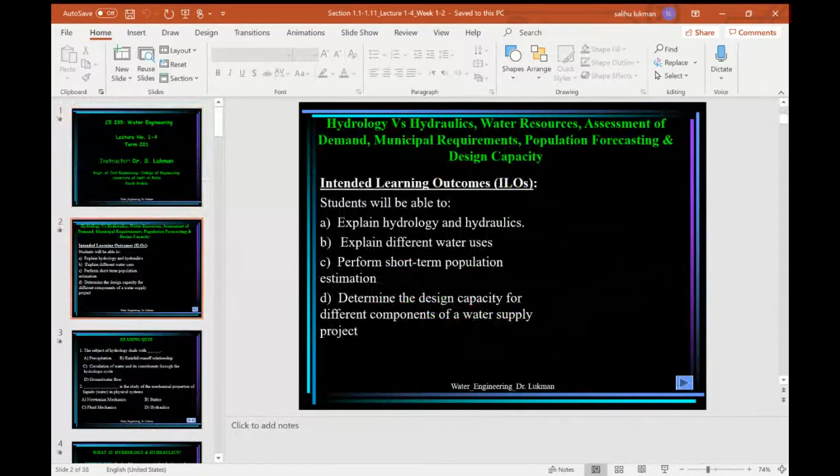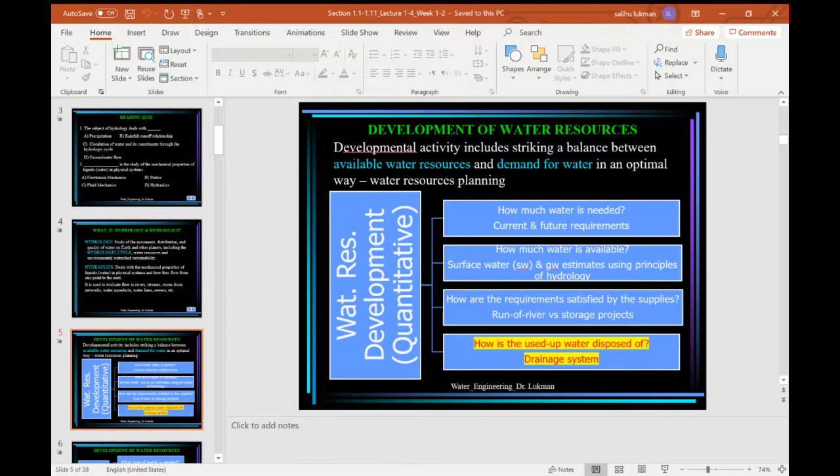Okay. So if you remember, last week we started explaining what is hydraulics, what is hydrology, and what do you mean by water resources. So I'm just giving you a recap of what we did previously. We discussed development of water resources, where we looked at the quantitative aspect as well as the qualitative aspect. The quantitative aspect deals with water engineering and the qualitative aspect deals with environmental engineering. And then the demand for water supply: we explained the 3 types of demands, withdrawal uses, non-withdrawal, and consumptive use.

By the way, who can tell me what is consumptive use, before we move on? Doctor, what's the question? Who can tell me what is consumptive use? What do you understand to be consumptive use from the previous lecture? Under water demand, I explained there are withdrawal uses, non-withdrawal uses, and consumptive uses. So what do you understand about consumptive use?

Doctor, when you take an amount of water and use some of this amount and retain the rest. When you take an amount of water, for example 10. When you have some water, we can use it again. So where will the water go? How can we lose the water? In withdrawal, maybe from 10 to 20 percent of the water we can't use again, right? Yeah, but how can we lose it? Why does it become lost?

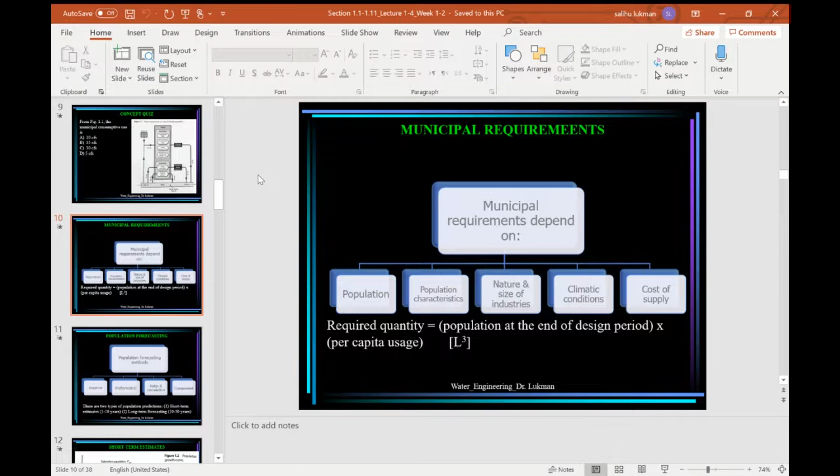That is water quantity that is no longer available for further use, isn't it? It is used up by crops, humans, evapotranspiration, industrial processes. I give you an example. When you take water, let's say you take 500 milli, do you understand? You cannot urinate, you cannot excrete all the 500 milli. You may excrete, let's say, around 400 milli or 450 milli.

But there will be some amount that your body cells will use in metabolic activities and cell growth and what have you, that cannot be excreted. Do you get the point? Can you hear me? Yes, doctor. So similar to crops, they need water for their growth.

So when they extract water from the roots buried inside the soil, some of the water they extracted from the soil is released through what is called stomata. These are tiny openings at the underside of the leaves. So they release the water through that. But some of the water is used for their growth. So they cannot release some of the water they extracted from the soil.

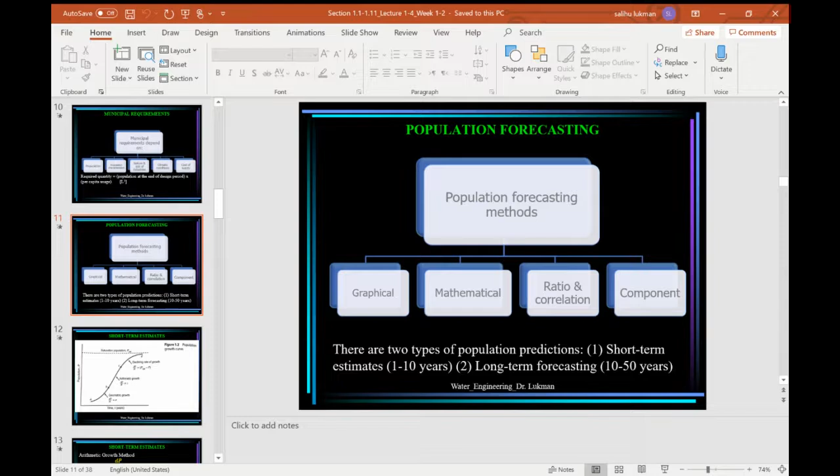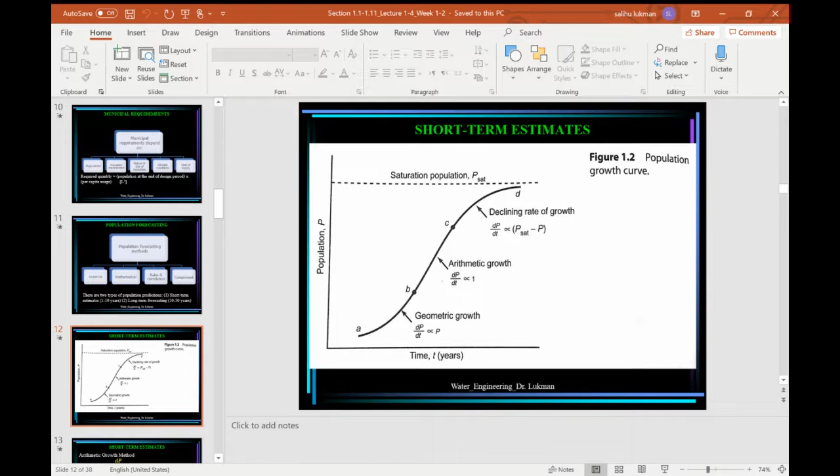We know this curve, which explains the geometric growth, arithmetic growth, and the declining rate of growth. A to B is the geometric growth, B to C is the arithmetic growth. And the formulations of each one, we derived them, and we solved an example. Is it clear? Shabab, is it clear? Yes, Doctor.

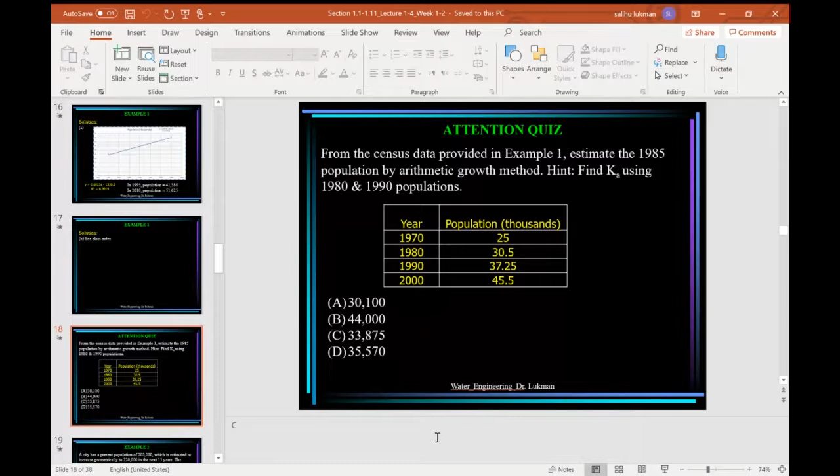All right. So now we will look at per capita water usage. Let me see if it has uploaded it. Try again. Okay, it has failed. Okay, so it can still continue.

So per capita water usage. What we mean by per capita is per person. Capita equals person. So it's the same thing as saying per person use. How much water do you need normally in a day on the average? It's normally expressed as the average daily rate, which is the mean annual usage of water averaged for a day in terms of gallons or liters, and it is indicated as per capita.

Let me use the red pen here. Oh, it is still not showing. Okay, let me use the blue one. So you have seen LPCD, isn't it? LPCD means liters per capita per day. L for liters, P for per, C for capita, and D for day. So the per day is missing, it is not shown there. So LPCD means liters per capita per day.

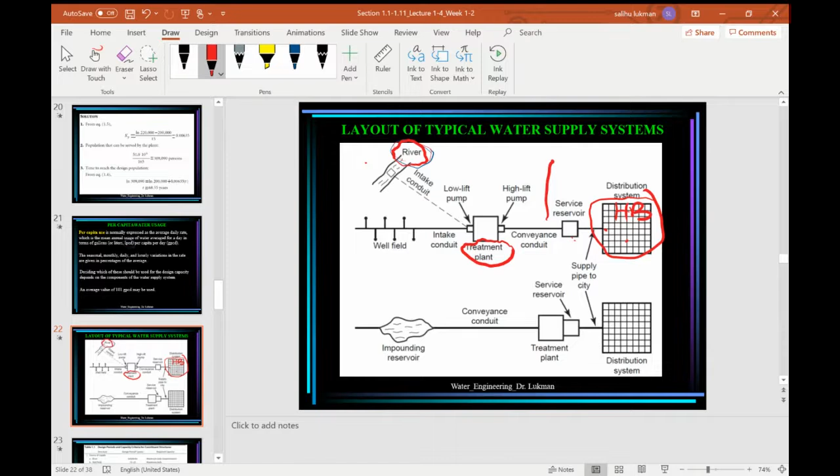So now there are two systems of distributing to households, okay? One is by gravity. By gravity here, it means you have a service reservoir which is, like I said, raised above the ground level, okay? This is like a huge tank containing the water, raised above the ground level so that water can just flow by gravity to the distribution mains, okay?

So each house has two tanks. You have the underground storage tank and the overhead tank, which is at the rooftop. Do you get the point? So the treatment plant will pump water to the underground storage tank of individual houses. And the individual houses will install a pump that will pump the water from the underground storage tank to the overhead tank. And then the overhead tank will supply all other plumbing in the house. Do you understand? So here, we don't use service reservoir, but there is direct pumping.

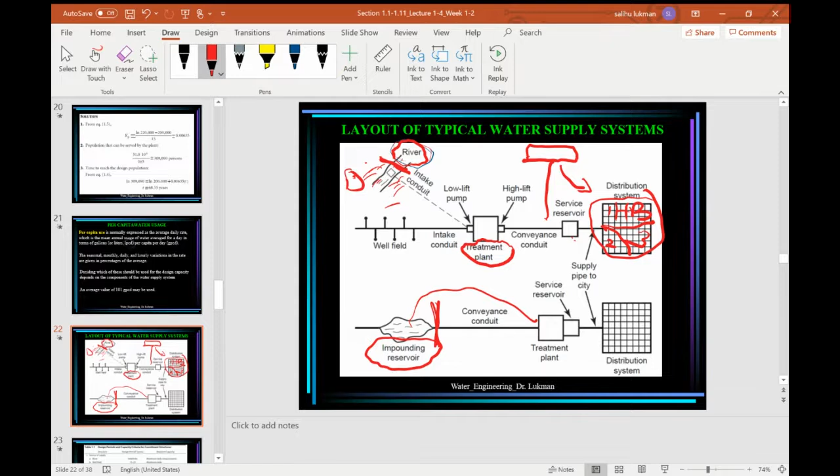Is that clear? So here we are explaining two types of typical water supply system. This is the first one, and this is the second one. The first one is using a service reservoir, okay, which is an elevated tank in the downtown, so that water will flow by gravity. In the first one, from the treatment plant to the service reservoir, water is pumped, but from the service reservoir to the distribution system, the flow is by gravity.

Is that clear? While in the second case, from the treatment plant, directly water is pumped to the distribution system without having a service reservoir. In this case, service reservoir is not available. So you pump straight into the distribution system. Like I told you, this is what is happening at Hafr Al-Batin, okay? Hafr Al-Batin town is divided into zones.

So they pump directly from the treatment plant. Here also you can have a service reservoir at the treatment plant, or you may not have it, okay? You can pump directly into the system, okay? And later in the last chapter, chapter 5, we are going to study the different distribution system, because the distribution system here is something else, okay?

This is called a loop distribution system, okay? And we have what is called the open distribution system. You have the branch, which is the open, okay? The branch distribution system and the loop or closed distribution system, okay? This we will study at the end of the course, which is in chapter 15, okay?

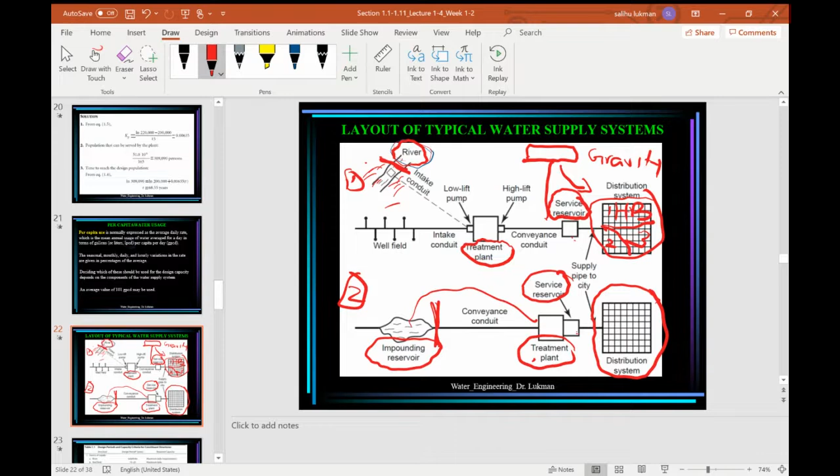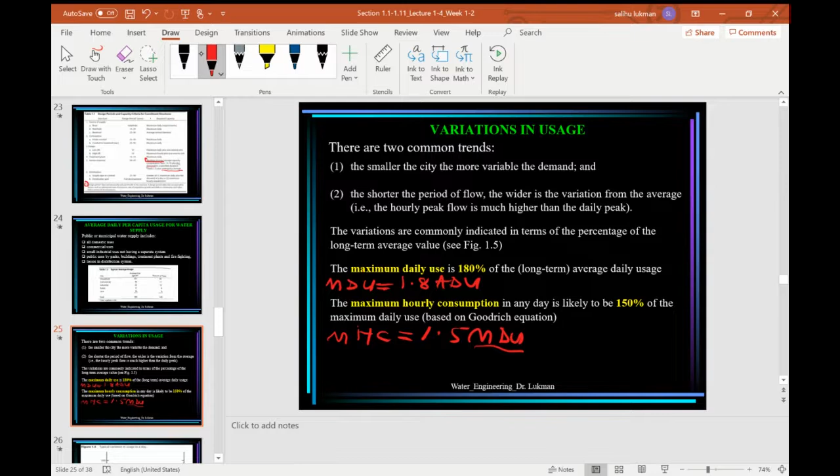Yes, Doctor, clear. Okay, now, based on the second statement, it says the maximum hourly consumption in any day. So let me represent the maximum hourly consumption as MHC, which is equal to 150% of the maximum daily use. 150% is 1.5, isn't it? Of the maximum daily use. Maximum daily use is MDU, correct? So now, what is MDU? MDU is 1.8 ADU. So 1.5 times 1.8 ADU, correct?

From here, isn't it? Now, the maximum hourly consumption, 1.5 times 1.8 is 2.7 times average daily use. And 2.7 in percentage is what? 270% of the average daily usage. Do you understand? So the relationship now between maximum hourly consumption and average daily use is that the maximum hourly consumption is 270% of the average daily usage. Do you understand? Do you understand this simple relationship?

Okay, good. Abdulaziz, you said 2.7. So, Abdulaziz, did you write your 2.7 after I finished my analysis? Before, okay, good. So Abdulaziz got it right in that case. Okay, so let's move on. But I hope it is clear to you.

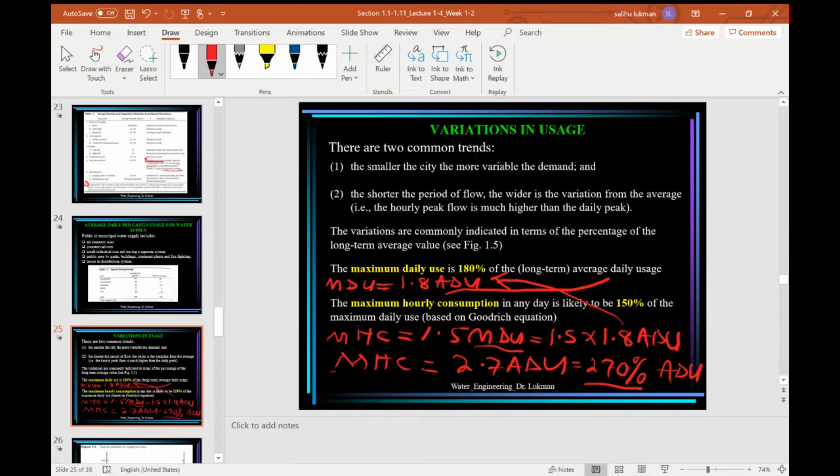Now, let's take this example. Here there is an equality sign. Here also there is an equality sign. Now, this example says: for a city having an average daily water usage of 150 gallons per capita per day from the municipal supply, determine the maximum hourly requirement, excluding the fire demands. What we were given here is the average daily usage, which is 150. We are asked to determine the maximum hourly requirement. We just found out that the maximum hourly requirement is 270 percent of the average daily.

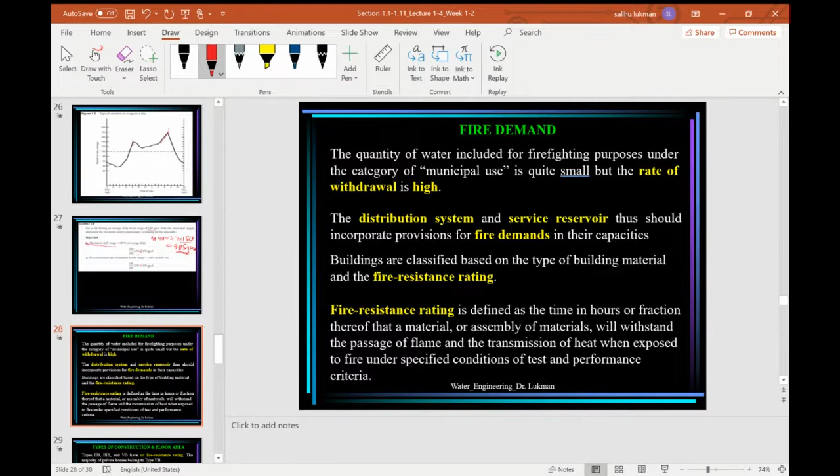Flame here is fire, isn't it? Can tolerate flame or transmission of heat when it is exposed to fire under specified conditions. Okay, that is the fire resistance rating. What are the types of construction materials? Types of construction and floor area. Here we have types 2B, 3B, and 5B. These three types have no fire resistance rating. The majority of private homes belong to type 5B. They have no fire resistance rating.

Okay. The fire area is the total floor area in square feet of all floor levels. All floor levels, meaning you can have two floors. If you have two floors, you will have to add ground floor and the first floor. So the fire area is the total floor area in square feet of all floor levels under the horizontal projection of the roof of a building, excluding the basement. For most development projects, the building with the largest fire flow determines the requirements for the entire project.

Why do we choose the building with the largest fire flow? If it has the largest fire flow, then that means it will need the most amount of water. So if you will be able to take care of the building with the largest fire flow, then definitely you should be able to take care of buildings with less fire flow, isn't it? But if you base your design on buildings with less fire flow, then your fire demand will not be able to take care of buildings with largest fire flow. Is that clear?

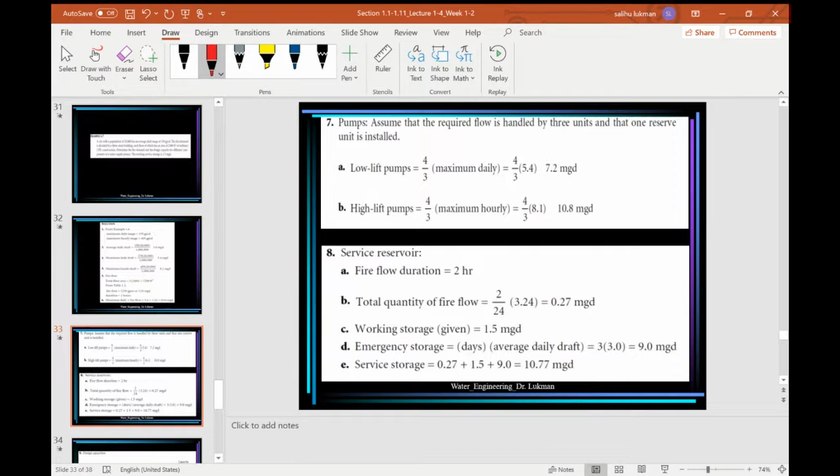So we will take a 5 minute break, and when we come back, we will take an example on how to calculate the fire demand and how to design the different components of the water supply system.

Okay, let's take 5 minutes. Yes. Okay, doctor. All right. So see you back in 5 minutes.

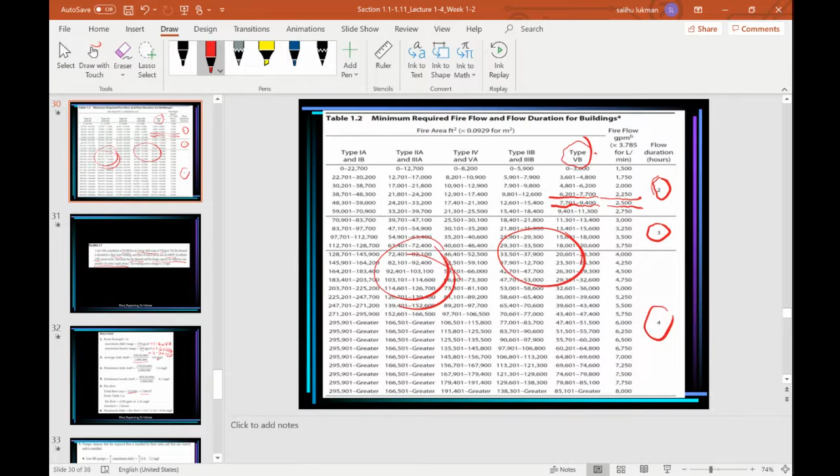Okay, so 3-story building here, the total floor is 3 times each floor of 2,400. So this is the total floor area, 7,200. So we now go to that table to determine the fire flow and duration. Our area is 7,200. The building type is type 5B. So where is the area falling? 7,200 falls here, between 6,200 and 7,700. So we now go ahead to determine the fire flow, which is 2,250 gallons per minute, and the duration is 2 hours.

Okay, so let's go back. You can see that 2,250 gallons per minute, or in million gallons per day. This is gallons per minute. If you want to convert it to million gallons per day, it will be 3.24 million gallons per day. And how do you do that? This is gallons per minute. So the first thing you do is to convert it to gallons per day. And then when you convert it to gallons per day, you divide by 1 million, and that's it.

And you know how to change minute to day. 1 day is made up of 24 hours. Each hour is made up of how many minutes? Each hour is made up of 60 minutes. So 24 by 60, that gives you the number of minutes. So 1 over that. So I hope you can convert between gallons per minute and million gallons per day. I hope you will not have an issue there.

It is simply, let me try to do it here. This is gallons per minute, and then the same gallon. Now 1 minute is 1 over 24 hours in a day times 60. So this will go up and multiply this, okay? And then you divide by 1 million. So when you do this, you will arrive at this value here.

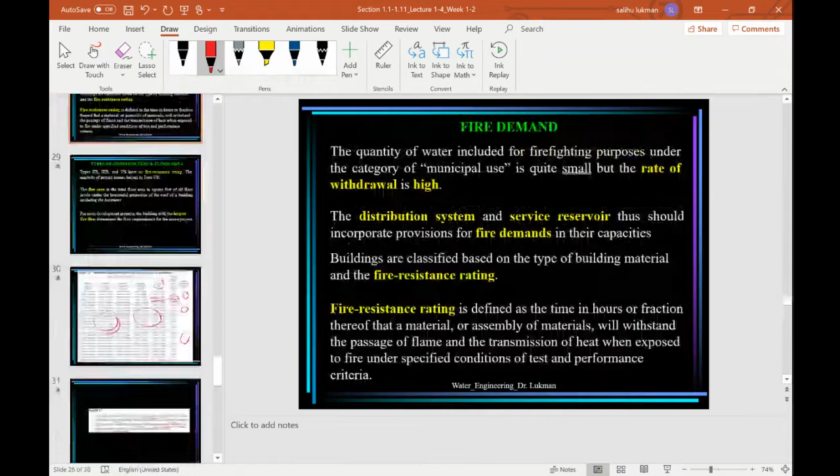Okay, now maximum daily plus fire flow, because in one of these tables, let me go back, you have one having maximum daily plus fire flow. To design the distribution main, you need the greater of maximum daily plus fire demand, or maximum hourly requirement. So we need to determine the maximum daily plus fire demand so that we can compare it with the maximum hourly requirement. Whichever one is greater, we pick that and use it for designing the distribution system. So that is why we are determining the maximum daily plus fire flow.

The maximum daily draft is already computed here, 5.4, plus the fire flow, which is 3.24, so altogether 8.64 million gallons per day. Now we'll go and look at all the different components of the water supply layout, starting from the pumps. We have two pumps, low lift pumps and high lift pumps.

Assume that the required flow is handled by 3 units and that one reserve is installed. Normally for the pumps you have more than one working simultaneously. So here we are assuming that the required flow is handled by 3 units, meaning you must have 3 units to be able to pump the required flow. But at the same time, you always have a reserve in case you want to take any one of them out for service or any of the pumps has broken down. So you must have a reserve unit.

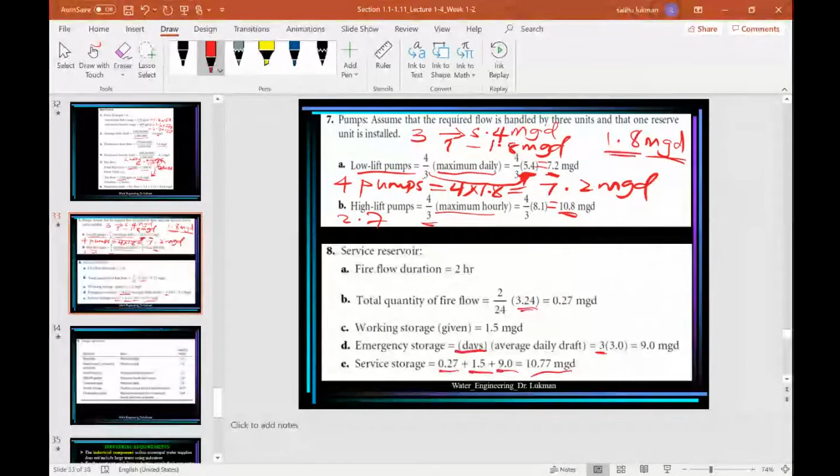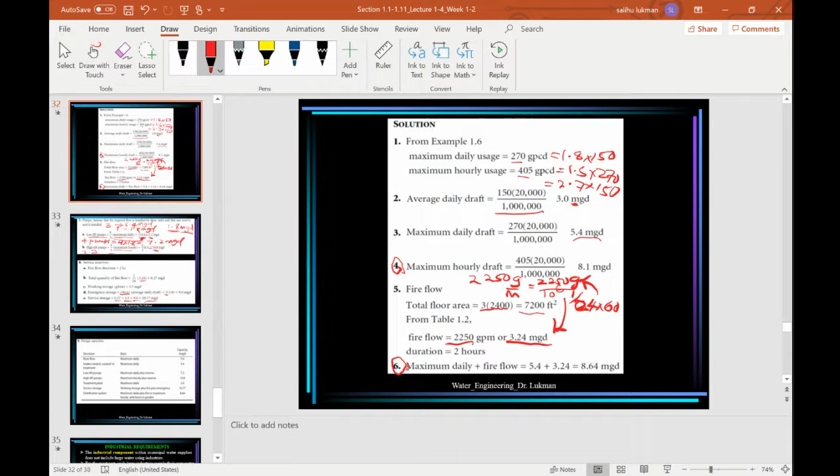If we go to the distribution system, we have the greater of maximum daily plus fire demand, or maximum hourly requirement. So which one is higher? We compare 4 and 6. This is 8.1, this is 8.64. So for the distribution system, we pick the greater one, which is 8.64. The total result is provided in this table here.

The river flow has to be based on the maximum daily. The maximum daily is 5.4. This we found before. Then the intake conduit. This is based on table 1.1.

The intake conduit, that is the conduit to the treatment plant, is based on maximum daily, 5.4. Low lift pumps, maximum daily plus reserve, 7.2. High lift pumps, which is maximum hourly plus one reserve, 10.8. And the treatment plant is based on maximum daily, which is 5.4.

And the service storage, which is based on working storage plus fire plus emergency, which is 10.77. Then the distribution system, which is maximum daily plus fire or maximum hourly, whichever is greater. So we compared the two and realized that the maximum daily plus fire demand is greater. So we pick the one that is higher, which is 8.64. So this is the final table of the design capacities.

Of course, it doesn't stop here. From here, for the pumps, you go and find the pumps that will satisfy this flow rate. For the treatment plant, you design all your treatment. Dr. Bashir will do that, isn't it? So this will be the inflow rate into the treatment plant. And then the service storage, and then the distribution system. This is the inflow into the distribution system. This we will take care of in chapter 15 when designing the distribution system.

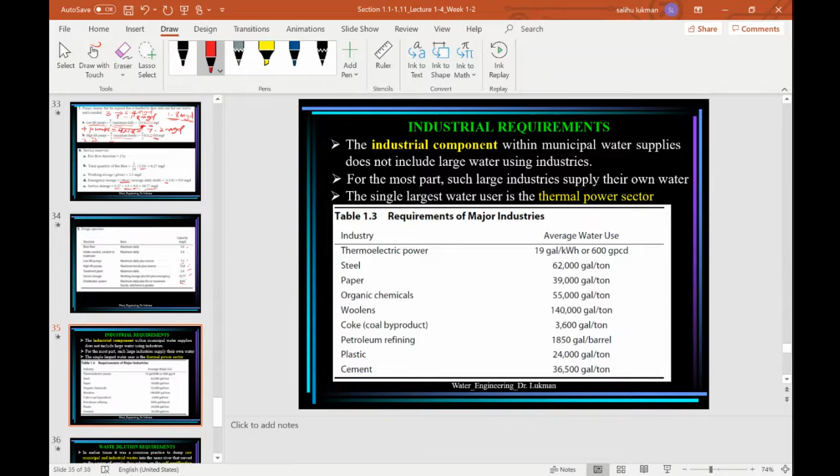So the industrial component within municipal water supplies does not include large water using industries. Large water using industries all have their separate water supply scheme. For the most part, such large industries supply their own water. The single largest water user is the thermal power sector. Table 1.3 gives requirements of major industries: thermoelectric power, steel, paper, organic chemicals, petroleum refining, plastic, and cement.

Now, waste dilution requirements. In earlier times, it was a common practice to dump raw municipal and industrial waste into the same river that served as the source of supply. You extract the water upstream, use it, and then dump the waste downstream into the same river, thus relying on the self-purification properties of the stream.

Self-purification: as water flows, it's exposed to oxygen. Oxygen dissolves in the water, and the bacteria utilize the oxygen, and the waste gets automatically treated due to the turbulence and the dissolved oxygen that is present. The aquatic life, the bacteria, feed on the waste. So the waste becomes automatically treated.

Dr. Bashir will teach you about wastewater treatment, most especially the biological treatment of wastewater, which utilizes bacteria to feed on the waste, thereby reducing it. By feeding on the waste, it oxidizes the waste, reducing it from harmful substances to less harmful substances. This takes place in wastewater treatment plants that use a biological treatment process, and it also takes place in a flowing stream.

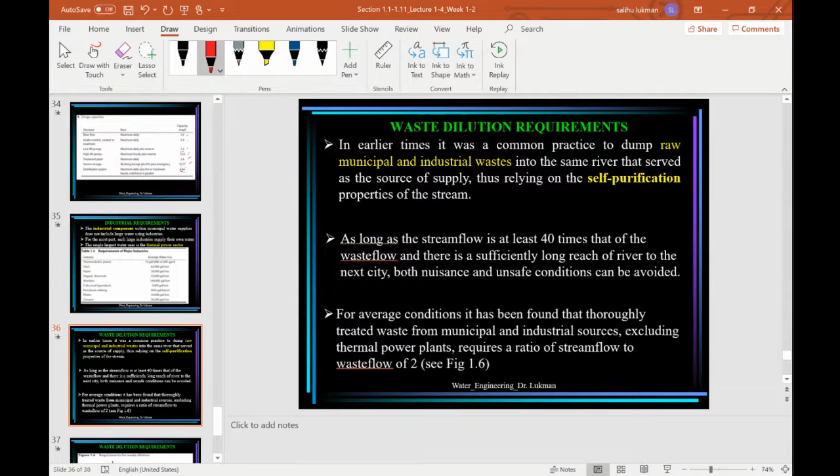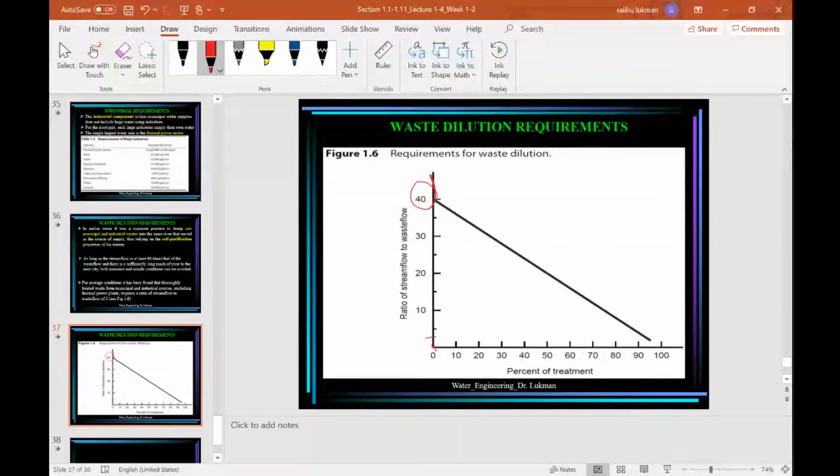Okay, so the flow rate of the stream should be just twice that of the waste flow. Okay, that is if the waste is treated. See figure 1.6, requirements for waste dilution. So this is the ratio of stream flow to waste flow. When there is no treatment, zero treatment, the ratio is 40. If there is treatment up to 90%, it reduces, up to close to 95%. So that is when it reduces to about 2. Okay, the ratio becomes 2.

Oh, this is the end of the first chapter. So study it very well. Okay, so next class we will have our first quiz, and then the week after we will have a second quiz, because our quiz is supposed to be every 2 weeks. And I will suggest that unless it is absolutely necessary, we don't postpone the quizzes. The quizzes are meant to force you to go and read those sections that we covered within the time frame. But if you accumulate the sections, that is when you will not have enough time to read thoroughly and understand and then do well during the quiz.

And all our quizzes will be taken during the lab period. Meaning before we start, we'll take our quiz within, let's say, just 10 minutes, 15 minutes, and then we start our lab. Okay, so all our labs will be physical. So please get ready for the quiz. Next week our lab is going to be physical. This week our lab, we will do it online, but next week you are supposed to come to the lab at 2. We'll take our quiz first, and then we take the lab session. Okay.